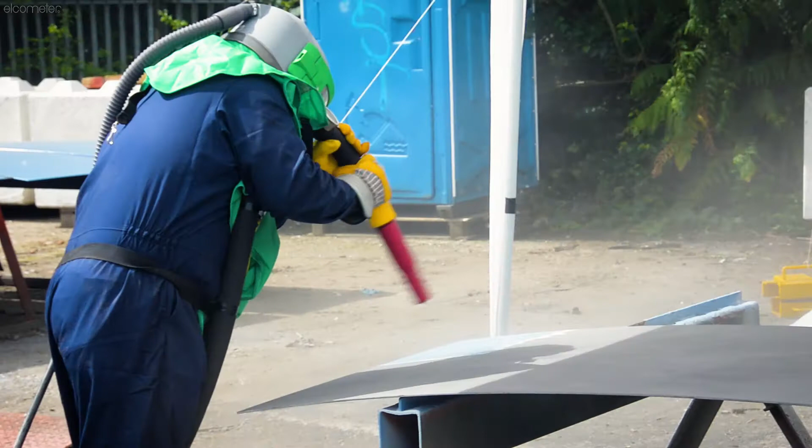When it comes to dry abrasive blasting, how much area you can cover in a given time and the amount of abrasive you use to do it are typically the key indicators for how efficient your blasting setup is. In this video series, we've been showing you how you can optimise your blasting setup to help you save time and potentially reduce the overall cost of your job.

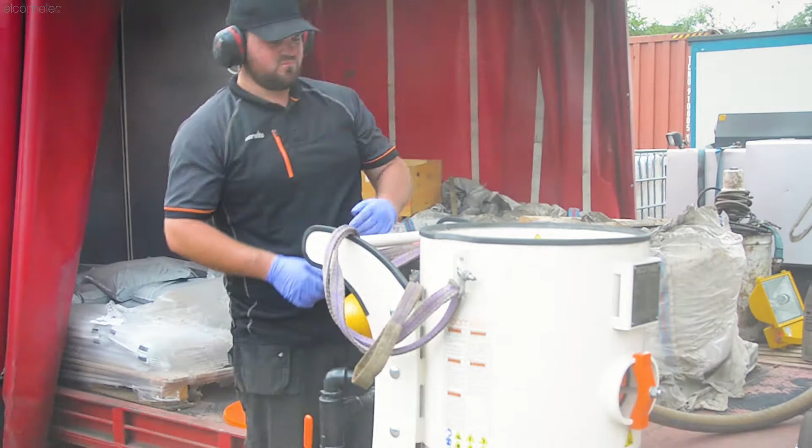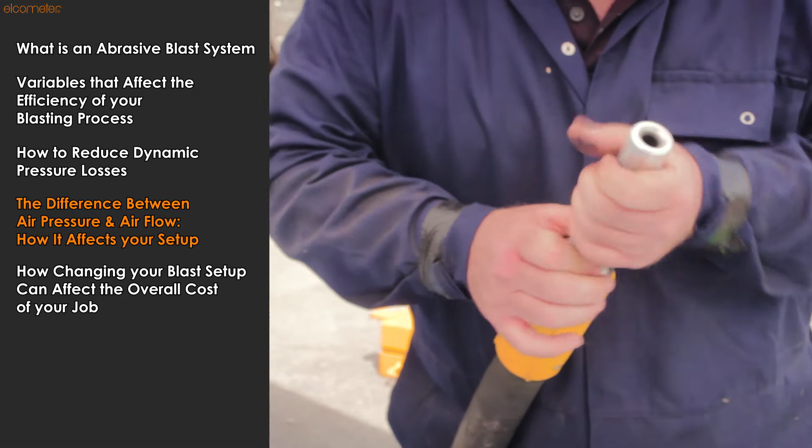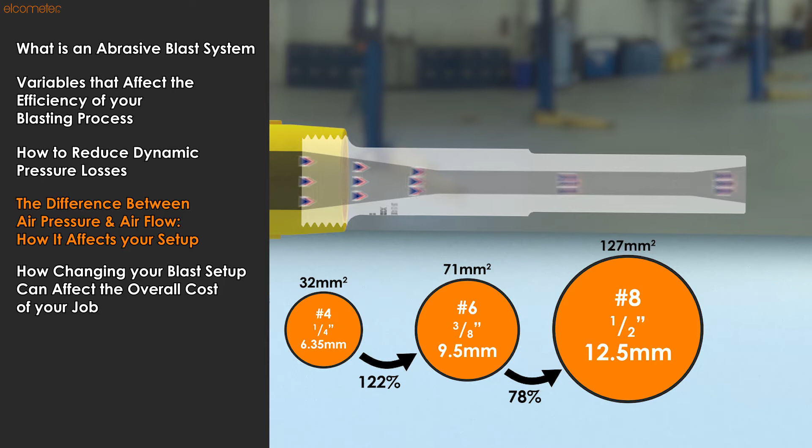In part 3, we looked at how the abrasive media valve setting, compressor pressure setting, compressor air capacity, and your choice of blast nozzle affects the efficiency of your blasting process. This led us to explore how getting the right combination of these settings is vital, and that using a higher compressor pressure and compressor air capacity meant you could blast efficiently using a larger diameter nozzle, allowing you to cover a greater area at any one time, which we demonstrated using Elcometer's blasting simulation software.

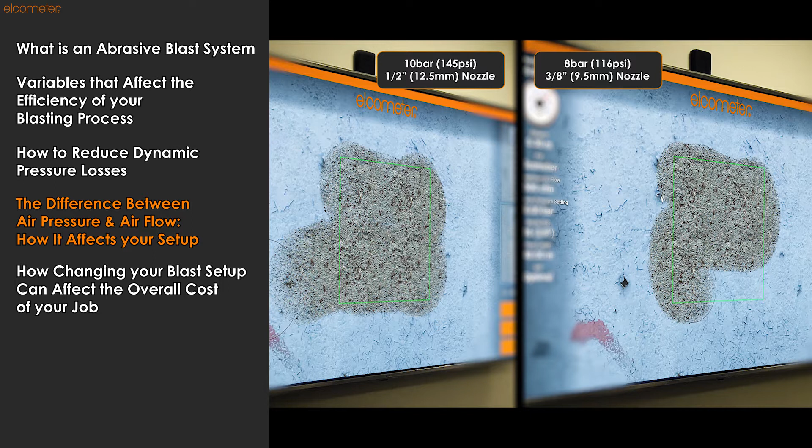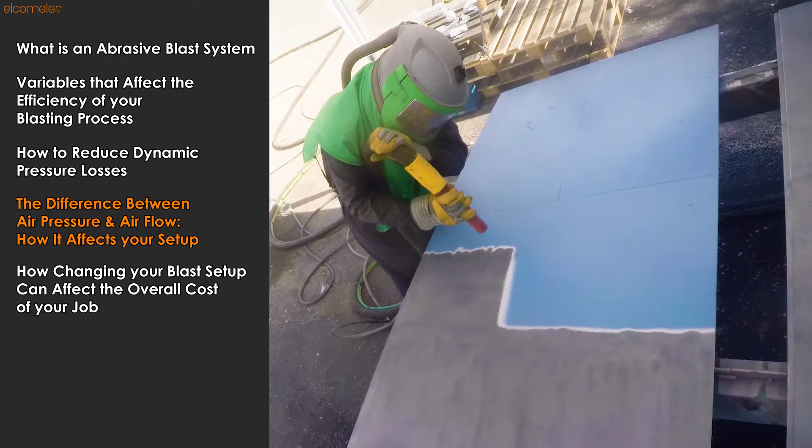However, what about the amount of abrasive you use throughout the job and its cost? Cost of cleanup, the cost of buying and running a higher CFM compressor. When all of the factors that affect the cost and efficiency of a blasting project are considered, is operating at a higher pressure with a higher CFM using a larger blast nozzle really a more cost-effective way to blast? Well, in this part, we're going to find out not only if this is true, but also how changing your blast setup affects the overall cost of your job.

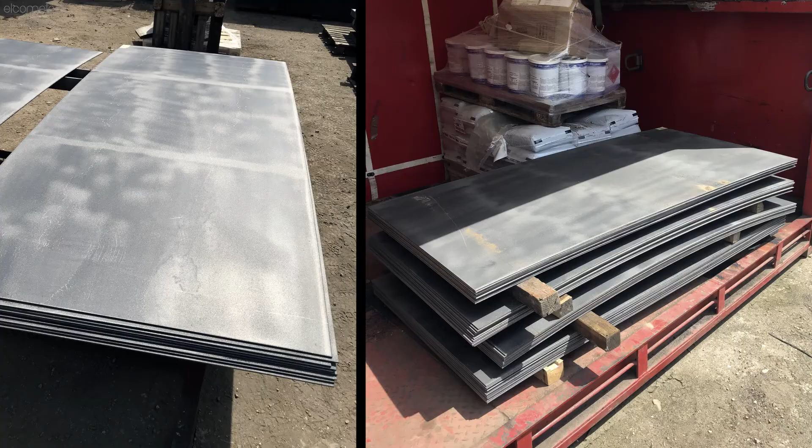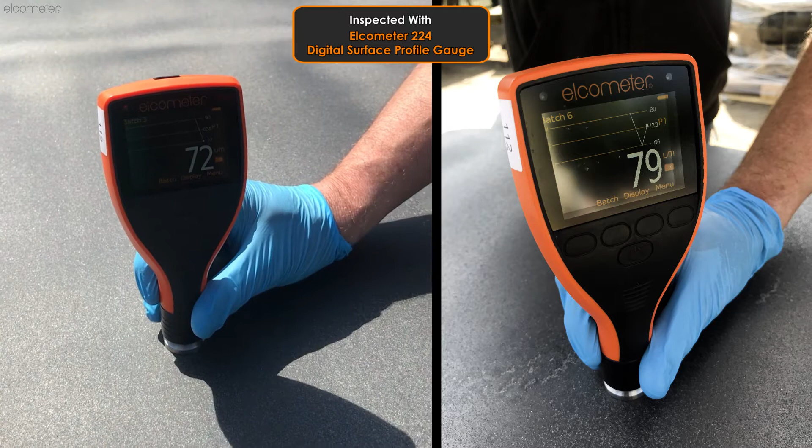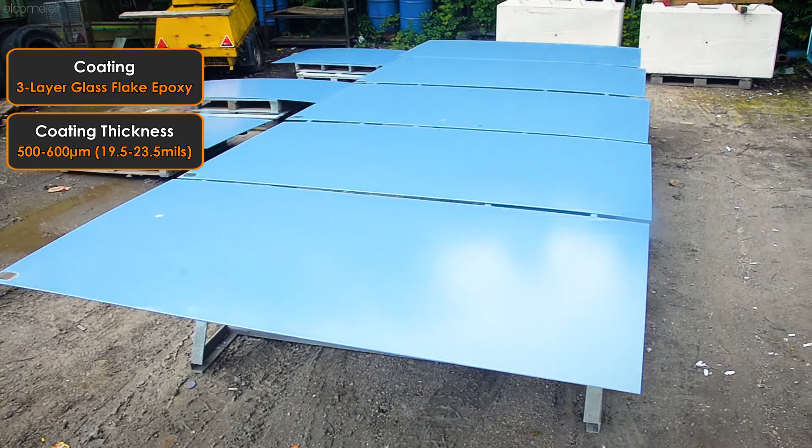To find out, Elcometer commissioned a series of tests undertaken by an independent blasting company with more than 30 years of industry experience. A number of steel panels were blasted to a nominal profile of 75 microns or 3 mils and were inspected using an Elcometer 224 digital surface profile gauge to ensure uniform test samples. The panels were then coated with a 3-layer glass flake epoxy within the thickness range of 500 to 600 microns. Each layer of the coating was checked with an Elcometer 456 dry film thickness gauge during the application process and prior to testing to ensure uniform results.

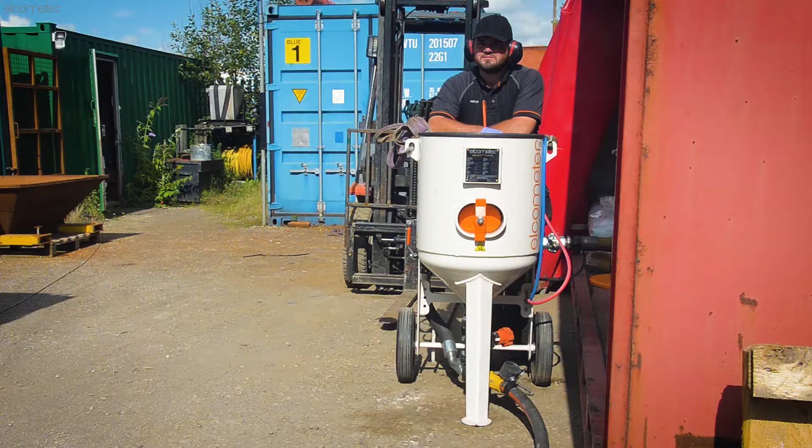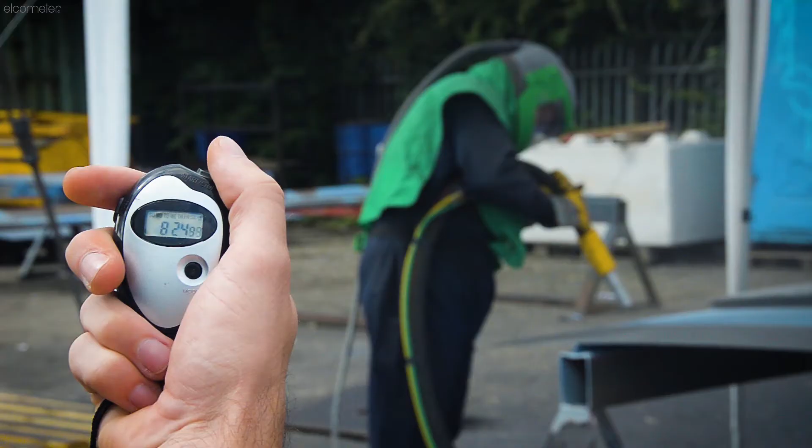Using an Elcometer abrasive blast machine, the panels were then blasted with a 60-30 copper slag at 3 different compressor pressures using 3 different single Venturi nozzle sizes, and how long it took to blast a predefined area to a minimum of SA 2.5 would be recorded. The blast machine would also be weighed before and after the test to measure the amount of abrasive used.

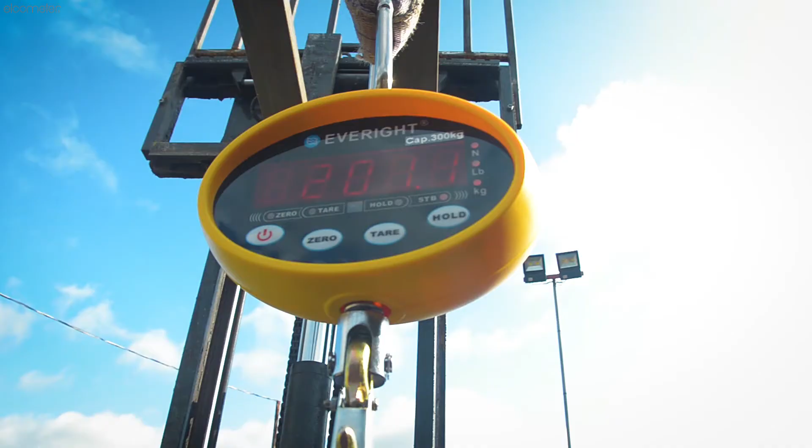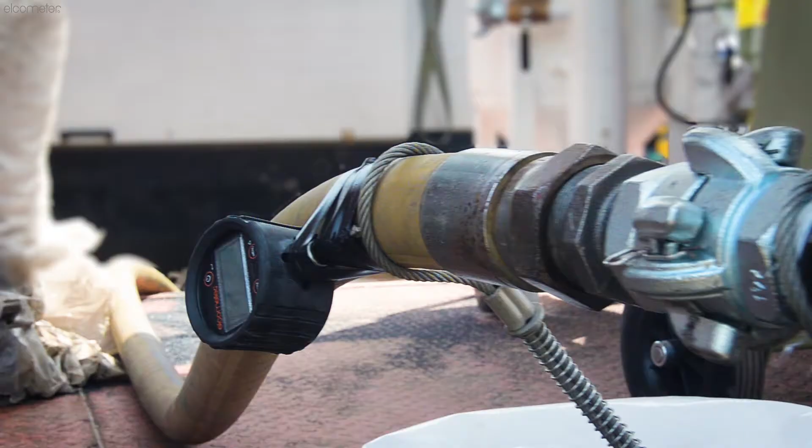The hose length was fixed at 90 metres or 295 feet with an internal diameter of 32 millimetres or 1¼ inches, and pressures were recorded going into the blast machine, coming out of the blast machine next to the abrasive media valve, and at the nozzle inlet, our all-important nozzle pressure.

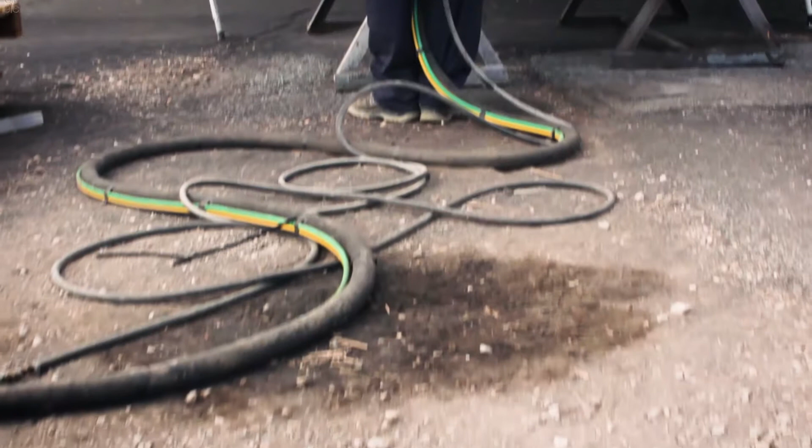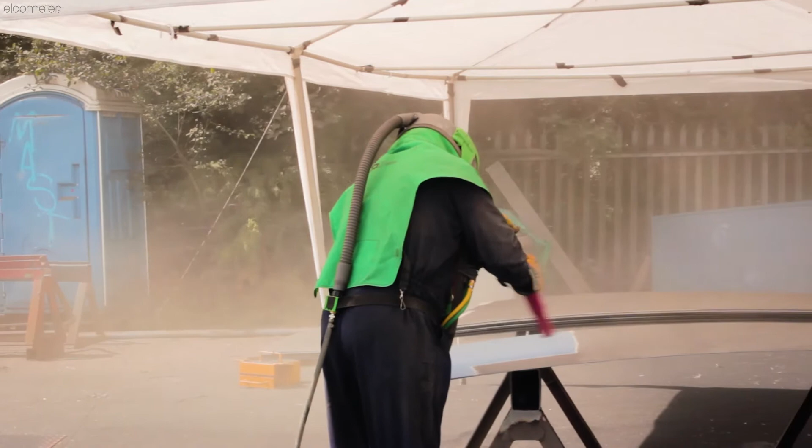We would then use the results of these tests and incorporate the costs of abrasive, cleanup not including disposal, labour, the blast machine, compressor fuel, and a 550 CFM compressor to work out exactly how much it costs to blast per metre squared for each combination of pressure and nozzle size to find the most cost-efficient blasting setup. So, what did we find?

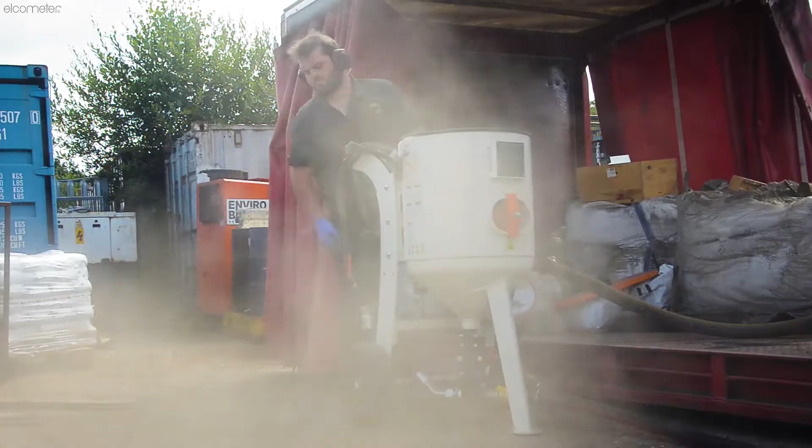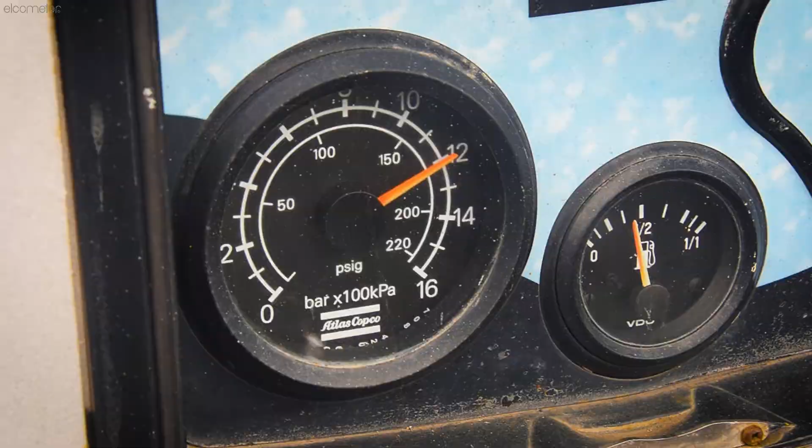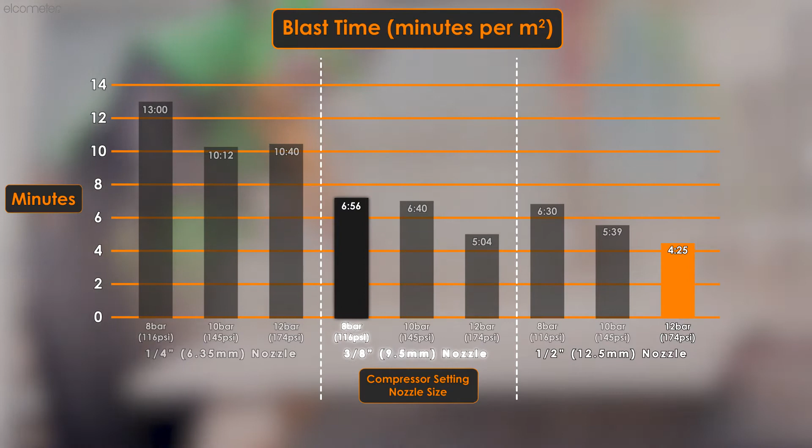After testing the 9 different pressure setting and nozzle size combinations, one thing became clear immediately. Higher compressor pressures with larger nozzle sizes were blasting the surface quicker than lower pressures with smaller nozzles. If we isolate the results of the widely used 8-bar compressor pressure with a 3/8 inch nozzle setup and compare it to the fastest time to cover a metre squared, which was the 12-bar half-inch setup, you can save up to 36% of your time every metre squared. That's a saving of up to 41 hours for every 1,000 square metres.

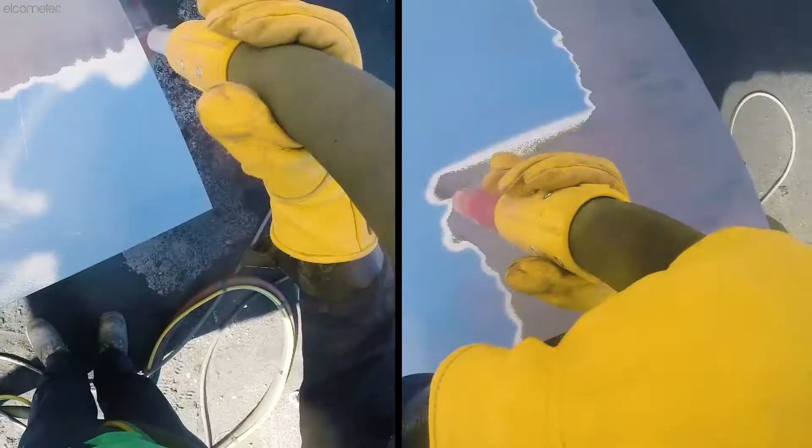If we compare the fastest and slowest setups side by side, you can visually see how much more effective the 12-bar half-inch setup is at cutting through the coating than the 8-bar 1/4 inch nozzle setup. Interestingly, when we measured the nozzle pressures of these setups, they were both around 7 bar or 102 psi, the widely stated industry target that, while still being manageable for the blaster to continuously hold, should yield optimum performance. However, as the footage shows, this isn't always the case. Compressor pressure and nozzle size clearly are more defining factors.

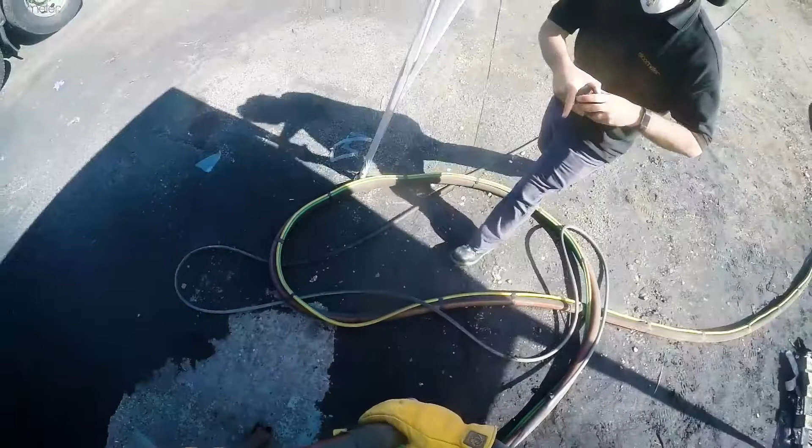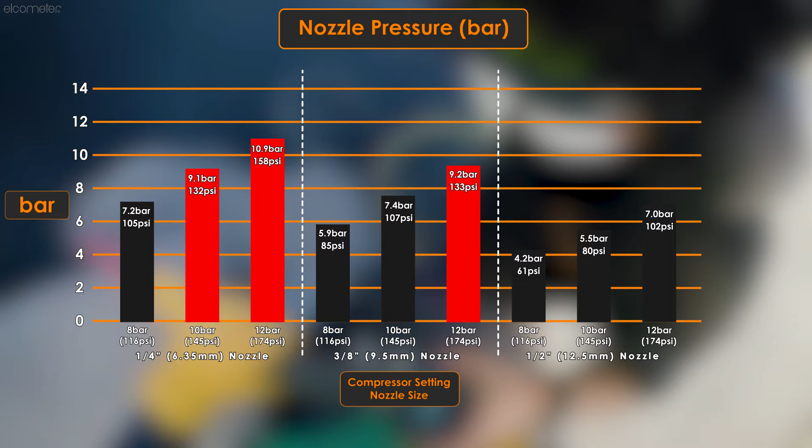If we compare the nozzle pressures of all the different setups we tested, immediately we should discount any setup where the nozzle pressure is around 9 bar or 131 psi or higher, as in a real-world setting the pressure at the nozzle would be far too great to continuously hold. Even if the setup is particularly effective at blasting the surface quickly, such as the 12 bar 3/8 inch setup, to expect the blaster to hold 9 bar of pressure for the duration of a typical shift is not realistic or safe. So what remains are the viable options for the most efficient blasting setup, with the 12 bar 1/2 inch setup so far the quickest, while still being comfortable to hold.

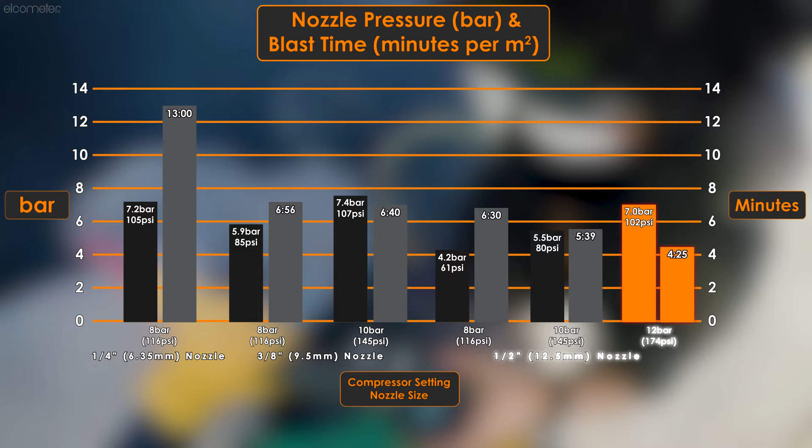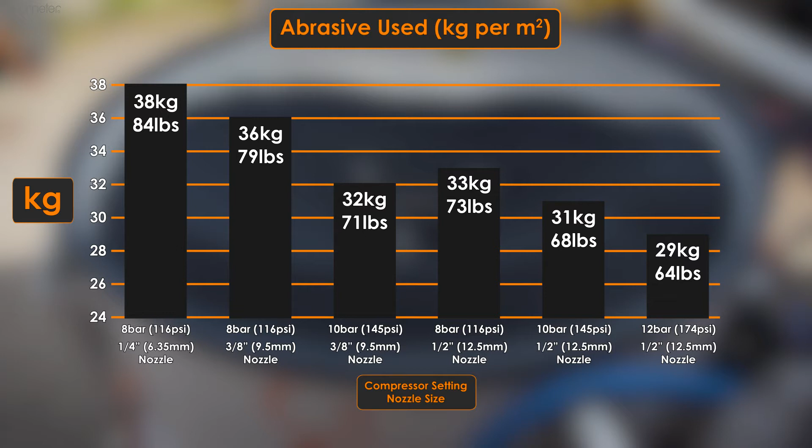However, in cutting through the coating more quickly with a larger nozzle, are you in fact using more grit? Well, comparing our viable setups once again, our abrasive use per metre squared graph follows a similar pattern to the time taken. Higher compressor pressures with larger nozzle sizes were blasting a metre squared with less grit. 7 kilograms less when you compare the widely used 8 bar 3/8 inch setup with the 12 bar 1/2 inch setup.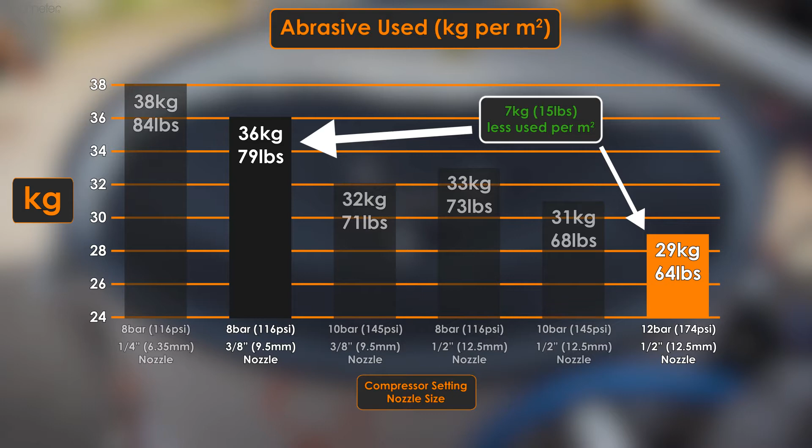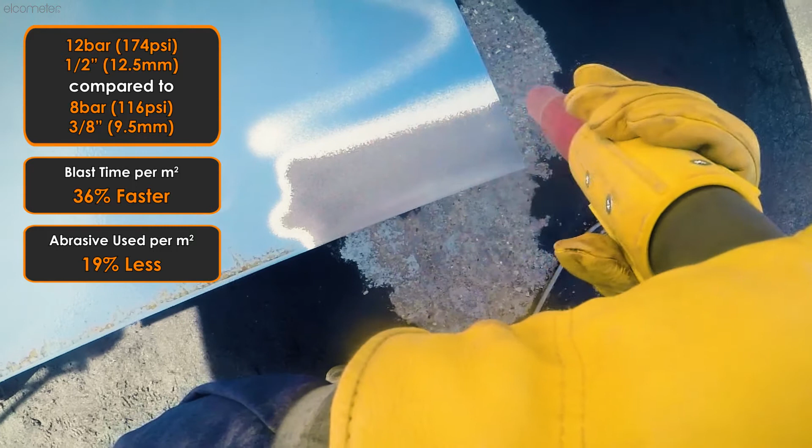So it seems like at this point, using 12 bar compressor pressure with a 1/2 inch nozzle is proving the most efficient, blasting a metre squared 36% faster and using 19% less abrasive than the typical 8 bar 3/8 inch setup.

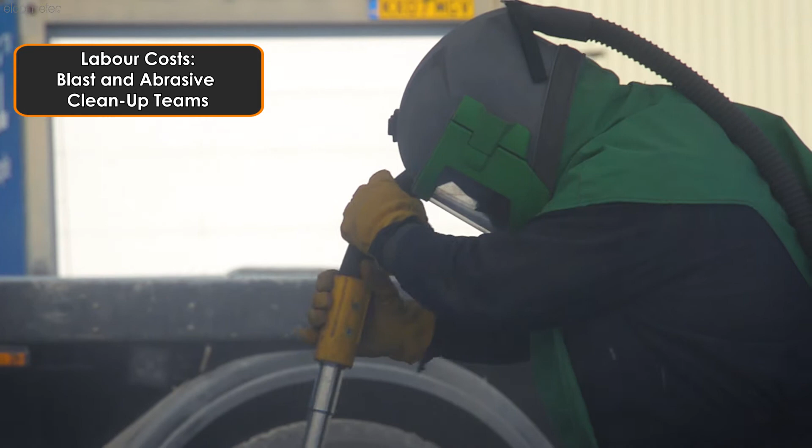But what about all of the cost implications? Well, we took the data from the tests and then added proportional costs to cover abrasive usage and its cost, labour costs for the blast teams and abrasive cleanup teams, diesel fuel used and its cost, the purchase cost of a 550 CFM diesel compressor depreciated over a standard 5-year time span, and the cost of an Elcometer abrasive blast system, again depreciated over a 5-year period.

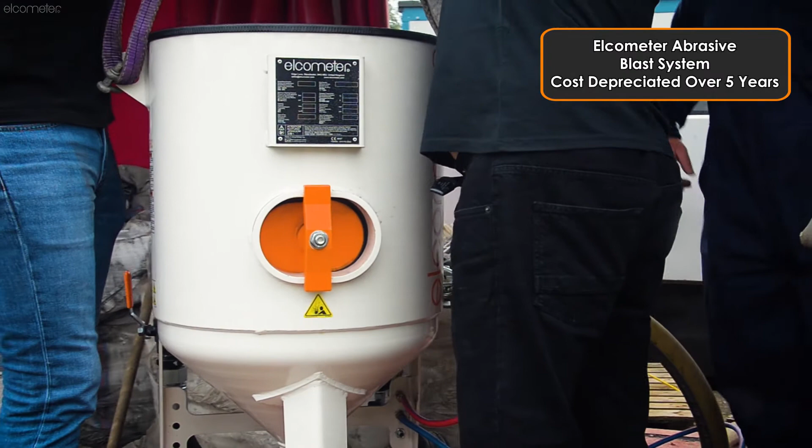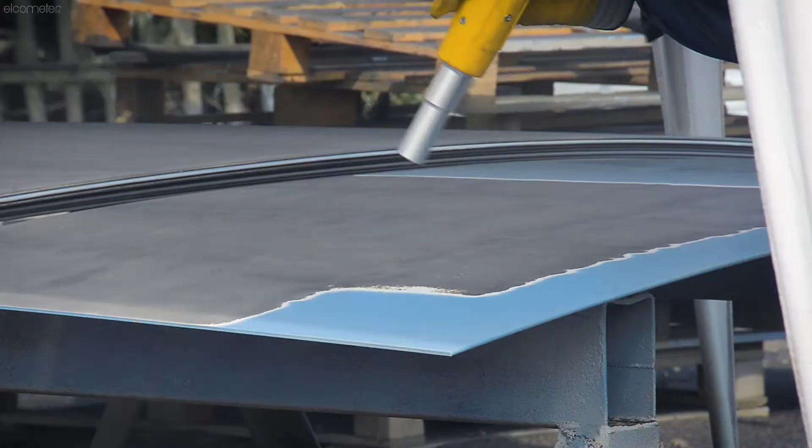Incorporating these costs with our test data, if we were to take the widely used 8 bar compressor 3/8 inch nozzle setting as the baseline standard cost of a blasting project and compare it against our viable alternative setups, where the nozzle pressure is less than 9 bar or 131 psi, the 8 bar 1/4 inch nozzle setup is far more expensive, producing costs up to 52% higher per metre squared.

However, as we increase both the compressor pressure and the nozzle size, the costs decrease, with the most cost-effective result coming from blasting using the 1/2 inch nozzle with the compressor set to 12 bar, which is up to 29% cheaper per metre squared than the typical setup.

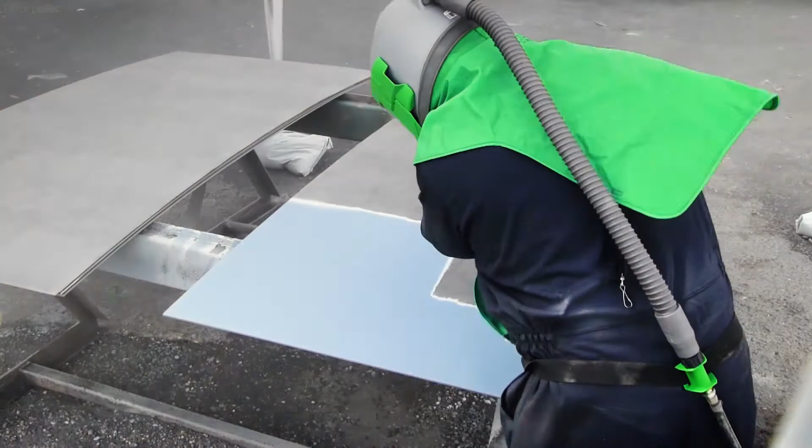If we were to expand that to a 10,000 metre squared blasting project, that's a saving of 420 hours in blast time alone, just from changing your setup. That's over 17 days of non-stop blasting saved every 10,000 metres squared.

Now, some may have reservations about the costs of making these changes, which may include replacing their current compressor with a 500 CFM model or higher, or replacing their 8 bar rated blast machine with one that can operate up to 12 bar. But look at it this way, even if we depreciated the costs of a 550 CFM compressor and a 12 bar Elcometer abrasive blast system over just 1 year, the relative costs per metre squared are still minor when compared to your ever-present abrasive and fuel costs.

Many will also be concerned about what the effects of having a larger compressor and a larger diameter nozzle will do to their fuel and abrasive costs respectively, but as you can see, they needn't worry. Due to the running time saved, fuel and abrasive costs per square metre uniformly drop, due to the efficiency gains resulting from the compressor setting and nozzle size increases.

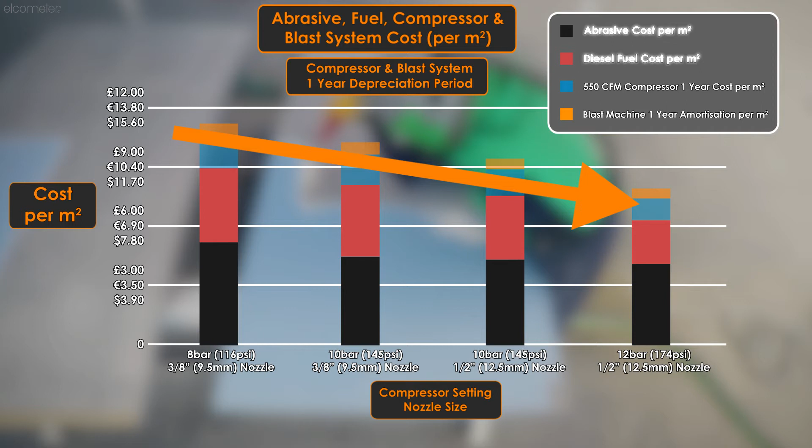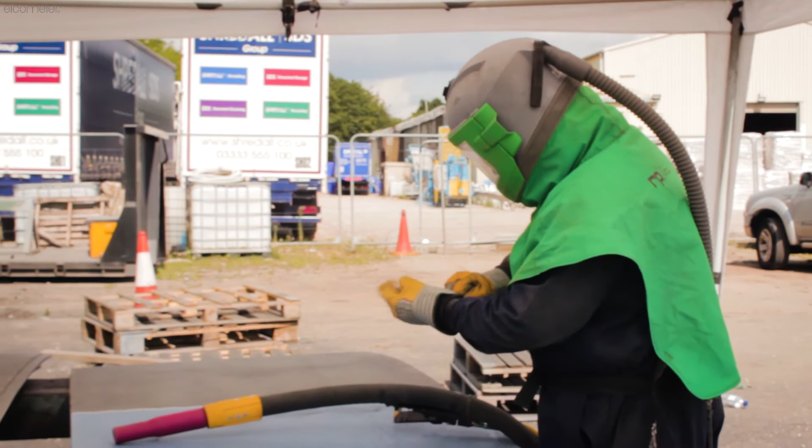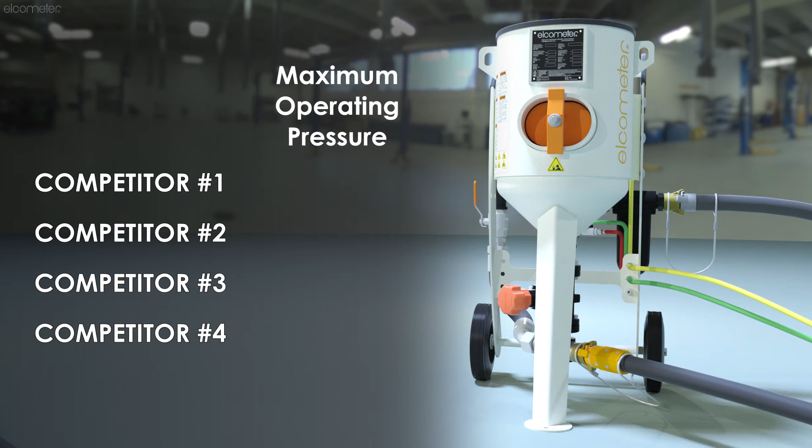As well as testing the Elcometer abrasive blast machine, 4 leading competitors' blast machines were also tested to find out 2 things: if the nozzle size and compressor pressure setting results were consistent across different blast machines, and how the Elcometer blast machine compared against them. It's worth mentioning that not all abrasive blast machines operate up to 12 bar. Of the 4 competitor machines we tested, only 2 operated up to 12 bar, 1 operated up to 10 bar, and the remaining up to just 8 bar.

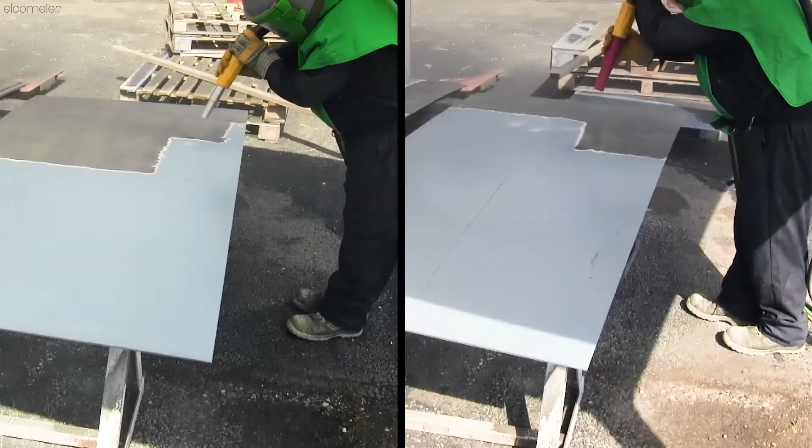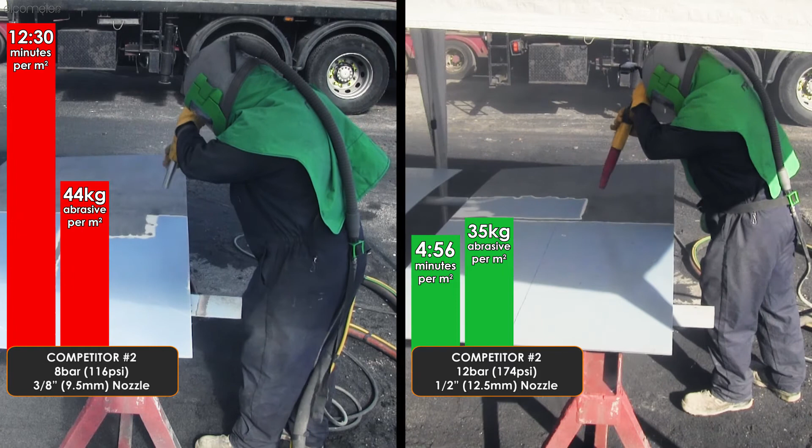What we discovered was, once the same costings were applied to the data, that every blast machine followed a similar pattern. Higher compressor pressures with larger nozzle sizes typically resulted in faster blast times, less abrasive usage, and lower overall project costs per metre squared, with the 12 bar 1/2 inch setup consistently yielding the best results.

What's more, when comparing the project costs per metre squared of each abrasive blast machine within each viable setup, the Elcometer abrasive blast machine proved the most efficient, with a 12-bar compressor setting using a 1/2-inch nozzle proving the most cost-effective setup of all, saving 13% over the next best competitor.

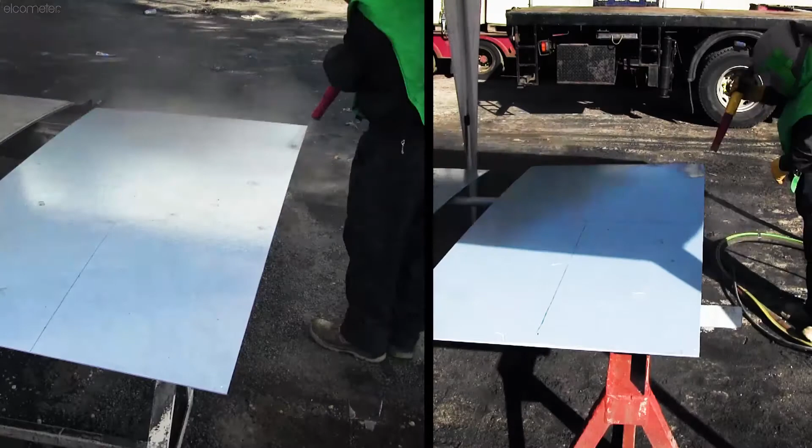If we visually compare these tests, Elcometer on the left, the next best competitor on the right, you can see how far behind the competitor is once the Elcometer blast machine has completed a metre squared, and used 6 kilograms less abrasive to do so.

Now, we aren't saying that 12-bar compressor pressure with a 1/2-inch nozzle is the setup you should be using for every blasting job, because depending on what it is you're blasting and where, your blast hose length and position will change, meaning the amount of compressor pressure you need to effectively power the system will also change.

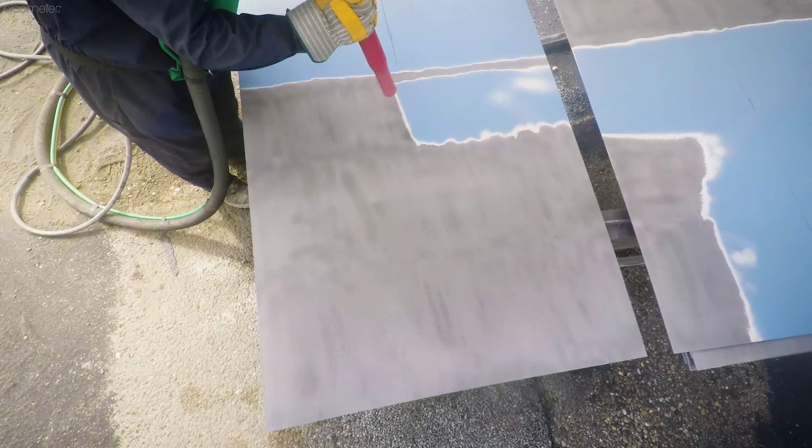However, what we are saying is that when you increase the amount of CFM airflow and compressor pressure and combine it with a larger nozzle size, as long as you have a nozzle pressure that's comfortable to hold, typically you'll be able to blast with greater efficiency compared to smaller volumes of air, compressor settings, and nozzle sizes.

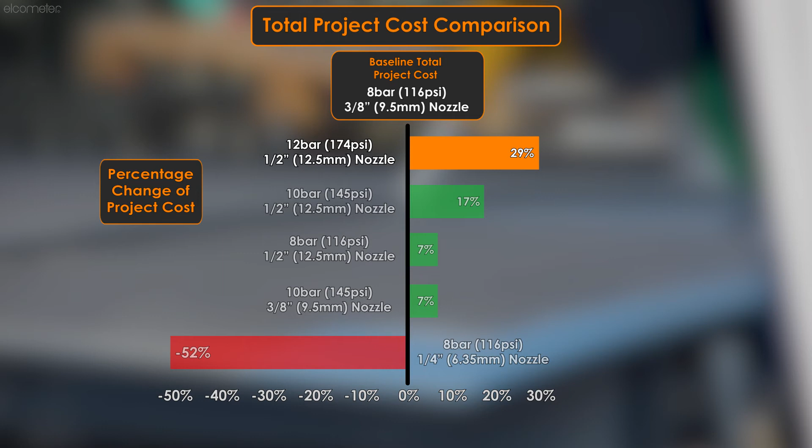And in addition to the potential 29% cost efficiency savings per metre squared from simply changing your setup, due to the unique design of Elcometer's portable and static abrasive blast machines, you can be up to 13% even more cost efficient than the next best performing blast machine at 12 bar, to ensure you've truly optimised your blast setup.

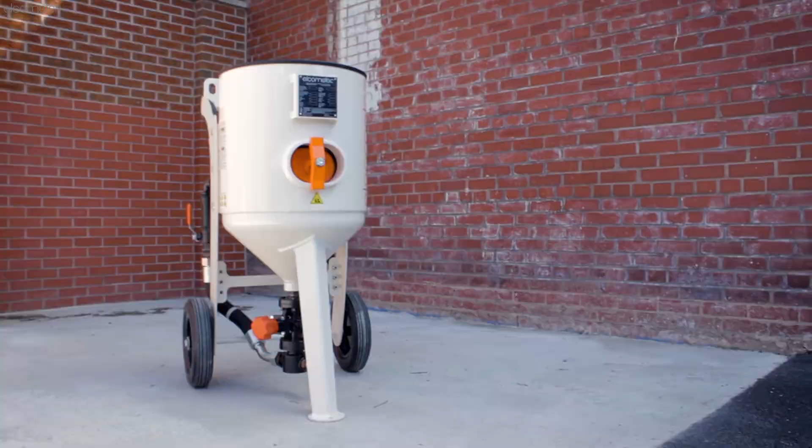However, we understand that this series is a lot of information to take in, so in the 5th and final part, we'll be summarising the key points of the series to help ensure you know exactly how you can optimise your blasting setup to save time and money.